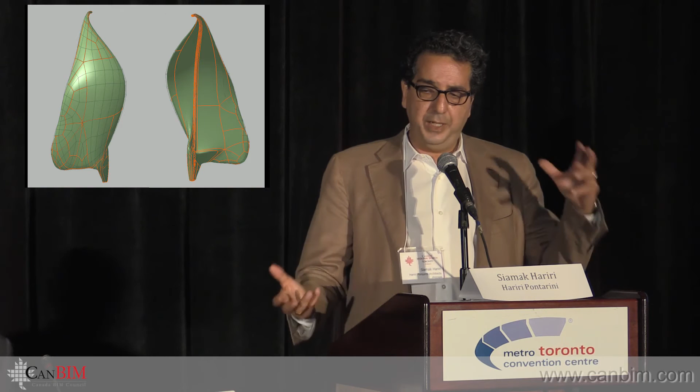So not only did the building have to be built, but it had to be defendable by several expert reviews on its ability to withstand earthquakes. You saw that recently, near Santiago, one of the largest earthquakes again. So whatever I'm presenting to you, it's all one thing. It's not just a building, it's not just an envelope, it's not just engineering. It was all one thing and was continuously designed as one thing.

But what we were very excited about was the way in which each wing had a complex geometry, a kind of fractal geometry, which I wanted very much to hold. You can see here how that is put forward as an idea on the skin. And frankly, when we went down to visit the people helping us with the technology early on, they wanted to make that geometry essentially all rectilinear tiles, almost like a bathroom surface, where you take a complex system and just create a simple rectangular tile system that covers the surface.

And what we wanted was, no, the entire architecture would be determined by the structure. And the structure would follow the inherent logic of this space frame that would be part of this geometry. And then everything that follows the structure would have to follow the interior discipline of what was set by the steel. So I like that very much.

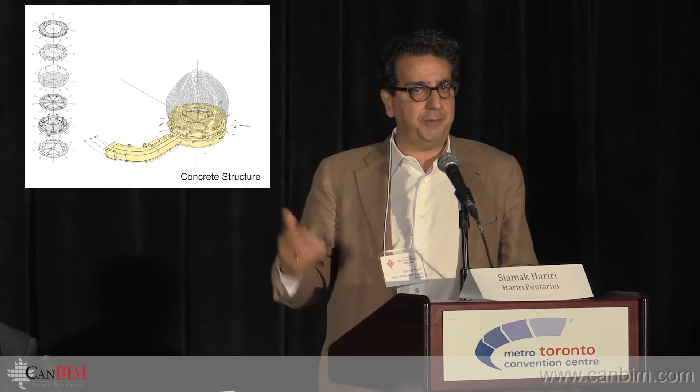And in fact, we were inspired by the designer at Apple, who had spoken to me about doing a house for him, and talked philosophically about how if you break open an iPhone, you can see the reason why that manifests itself, buried into the interior logic of how it works. And I like this very much in the expression of the architecture, so that the pattern on the outside is determined by the structure. And so this was Gehry's first attempt. You can see the difference, and we threw that out.

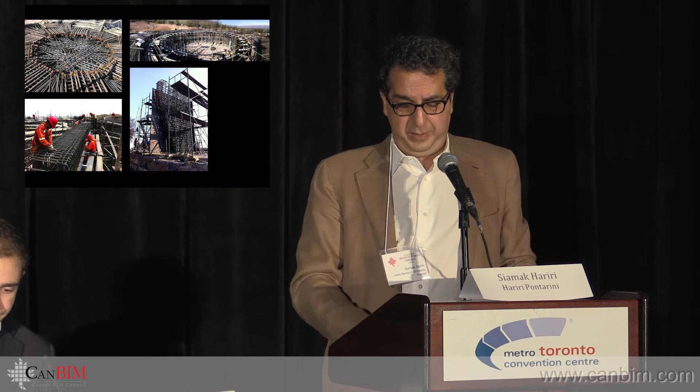Every object, as you know, is described independently in the system. So all of the exterior skin, every piece of it is described as an object. Everything on the interior is described as an object. Everything that is part of the structure is described. And so this allowed us to do what the client wanted, which we can get into at length, but they wanted a GMP for the whole project, and we had to deliver it with a guaranteed price.

And I was saying that now it's almost all built, and I think there are only about 3 change orders on the whole project that were non-client related. So it's really quite an extraordinary thing that the technology enables. This is not just allowing for crazy forms, it's allowing for the exploration of serious architecture, but also delivering it within a format that tries to play down the risk. And I think this is really what I wanted to deliver.

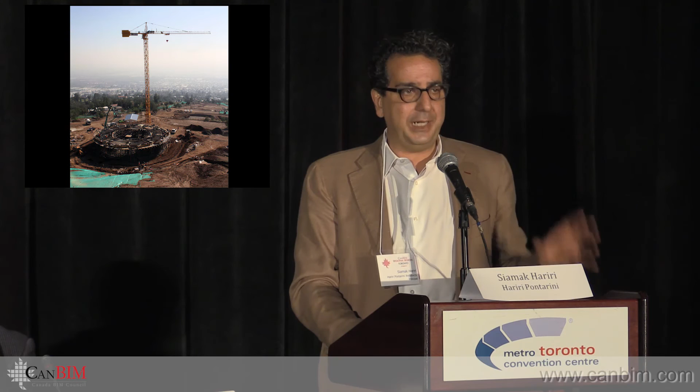If there's any one singular message to this conference, it's that we have to get out of this idea that this is about just allowing the designers to do their stuff. No, this is about allowing us to solve very engaging, interesting problems in a new world and delivering them within a cost that the client sets out that's difficult to meet. And so this project had to be delivered for the shell at roughly 18 million euros. And we were not allowed any deviation from that.

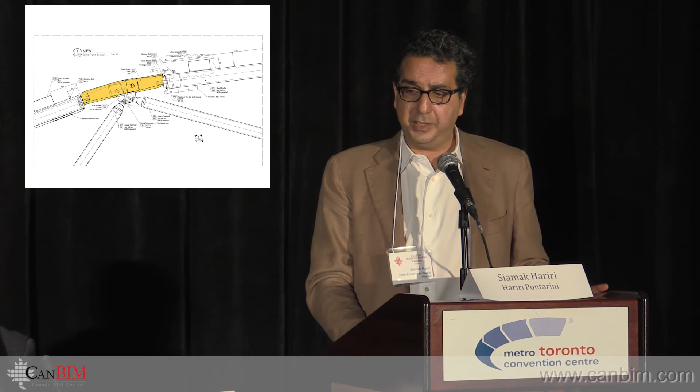And so we had to work constantly to make that happen, and we were able to bid it around the world with this approach. And you can see the CATIA has every single piece in it, and the structure was then taken and described, and the pattern of the outside is determined by the space frame pattern on the inside, which was tested early on. These are scale models, 1/6, just to prove it to ourselves; the steel fabricators would not believe it.

You have to remember, this is about 2005, 2006 that we were building this model. And the fabricators themselves would not believe that the CATIA would actually close. And so we had to prove through the making of these models that the technology actually was precise and would enable closure. So every little piece you can see in the model was fabricated with some accuracy. And that was our own testing ground.

Eventually, the concrete work was done by Chilean trades, of course, and there's a seismic isolation system that was designed by 3 universities, quite a complex undertaking in and of itself. A pendulum system, so it can move up to 60 centimeters and come back to its original center.

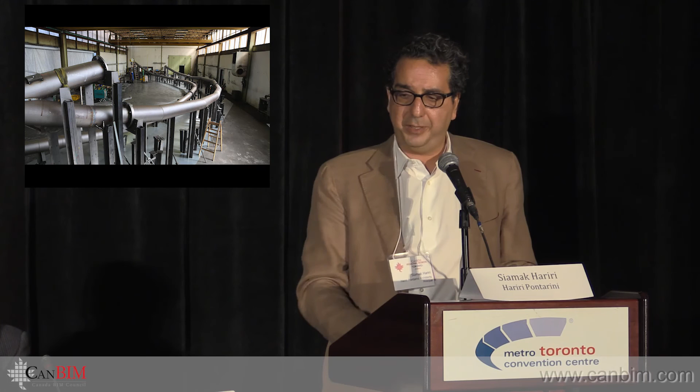And you can see here how each piece was created and the complexity. It's just mind-boggling when you actually go through each piece and what it had to do. But really, at the end of the day, it was mostly an engineering issue, and once it went to the fabrication arm, it simply was about being extremely organized, and every piece was numbered, stamped, delivered, brought, and assembled.

And you can see here the layout in the shop of each of these pieces. And then the fabrication of the steel was really another wonderful thing to watch, because the Germans took each wing and basically put it on its side and transferred all of the points down to a horizontal plate, which they then described, mapped out, and then created a system. So you can see here, but what you don't maybe see is that the entire floor is this etched steel plate with all of the various coordinates and numbers laid out.

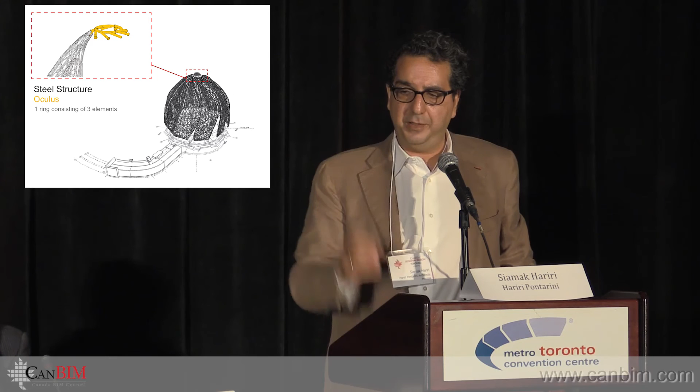And then each piece was, you can see, assembled. I love this part of it. Certain pieces were so important to be done perfectly. This is the oculus, the kind of eye to the heavens, that had to be built absolutely perfectly. And only one guy, this one employee of Gartner, was the only person that would be allowed to do it. So he built the oculus.

Cast glass, a material we wanted light to go through the surface. Another kind of system: we set up a little shop here, 7 kilns. We broke the glass in a certain pattern, melted it to a precise temperature, each one of them computer monitored to create this wonderful pattern, sheets and sheets of it, and then of course everything again through the CATIA is delivered as a pattern to Germany, water jet cut, each piece numbered, and then the fasteners are attached to the back, and you can see the frames, each numbered and then assembled on site.

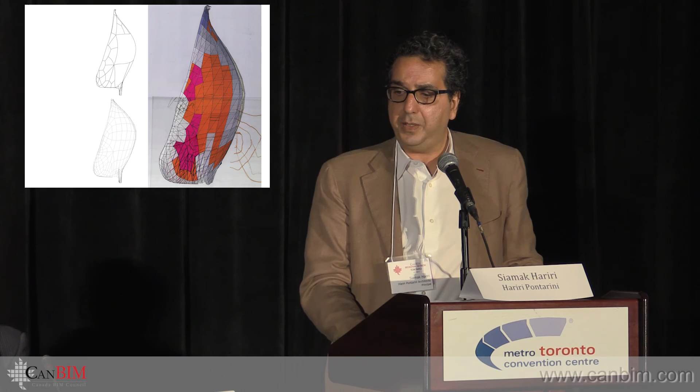Again, the only way to do this within any kind of reasonable approach is embracing the idea that the technology is helping us. And what I love, of course, is that there is no single drawing, it's all one thing. And in that sense, the building has always been one thing, whether it's a steel piece or a glass piece, or in this case, some of the curved glass pieces. If there was a single most difficult thing to do, it's all the curved glass pieces, where each mold had to be reverse cast and then delivered from one place to another, and then the glass pieces were all slumped to precise shapes.

And they're built to a precise shape, but they're built large. And like you do with the dough around the pie, you have to trim it. And so they were all sent like this to Germany, where they were cleaned up and then cut to a precise shape and then nested and brought on site. You can see the kind of extraordinary reflection. So the temple has this ability, which we wanted very much, to absorb the light, this idea of structured light. And you can see the light changes with the times of the day. And here it is, early morning light, and how the light goes through.